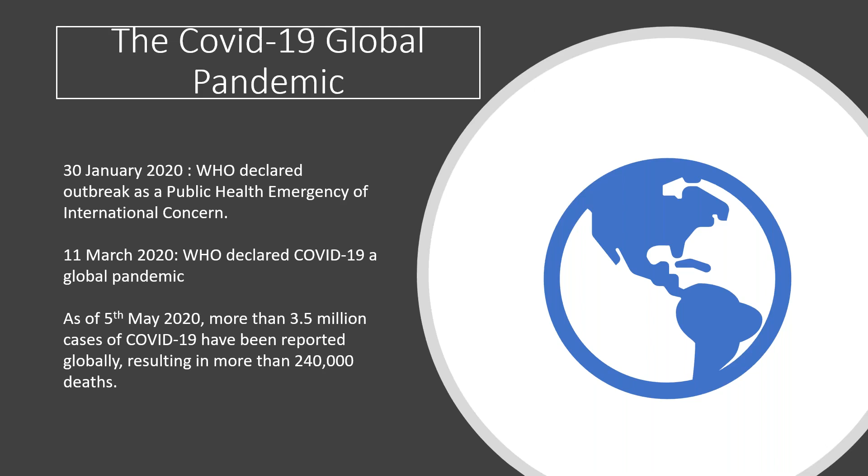This all started in November, December, and on 30th January 2020, WHO declared this outbreak as a public health emergency of international concern. And on 11th March 2020, it was declared as a global pandemic, and things changed from then onward. As of 5th May 2020, there are approximately 3.5 million cases of COVID reported globally, resulting in more than 240,000 deaths.

Now, what is the characteristic of this pandemic? It's very important to understand. This disease has spread quickly to all corners of the world, and its capacity for explosive spread has overwhelmed even the most resilient health systems.

Severity: overall, 20% of the cases are severe or critical, with a crude critical clinical case fatality rate currently of over 3%, increasing in old age groups and those with certain underlying conditions.

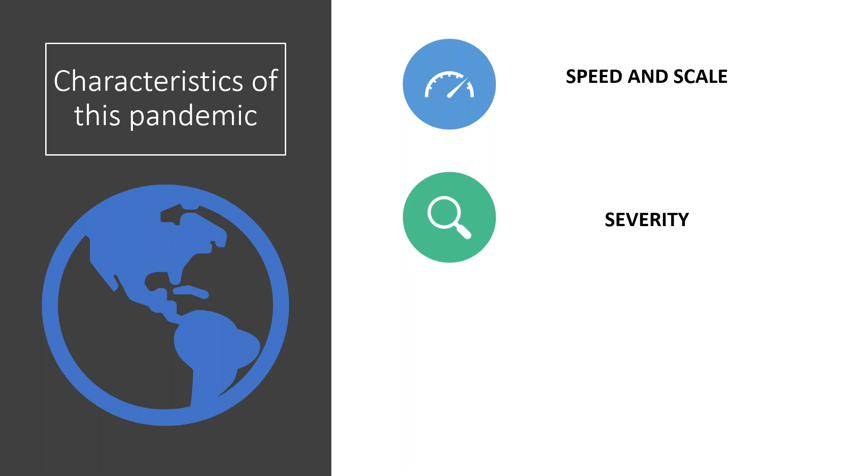And this pandemic has sent shocks to health and social care systems. Measures taken to control transmission have led to broad and deep socioeconomic consequences.

So what is this COVID-19? This is basically the name of a disease, coronavirus disease 2019, called COVID-19. The official name of the virus spreading this disease is SARS-CoV-2. The range of symptoms for this disease are from mild illness to acute respiratory distress. At present, there is no vaccine or therapeutic provision proven to treat or prevent COVID-19.

Now, it can affect all ages. However, as I said, it gets more severe with age.

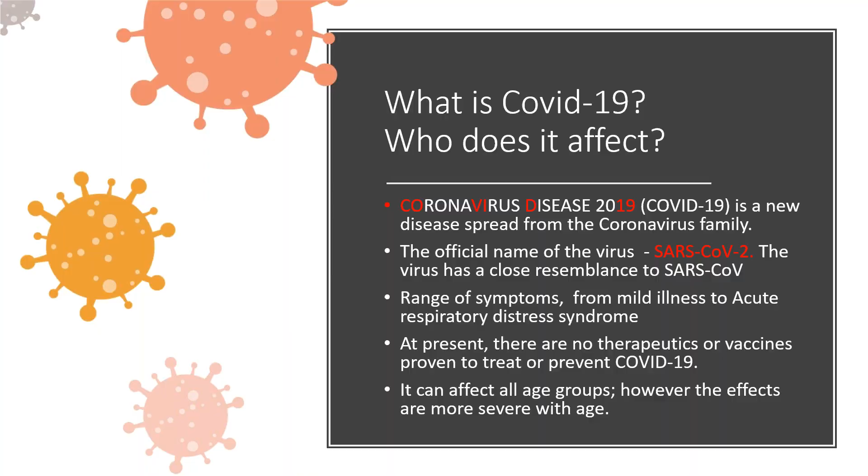How is it transmitted? Of course, person-to-person contact. So someone with the virus sneezes or coughs on anyone, leaving respiratory droplets on skin or clothing, or someone touches someone who has the virus on their skin or clothing. That's how it escapes from an individual, and then the transmission happens. The individual then touches themselves, giving the virus an entry point via mouth, nose, and eyes.

So there are 3 stages: it's an escape stage where it escapes from one person, there's a transmission stage, and then it enters.

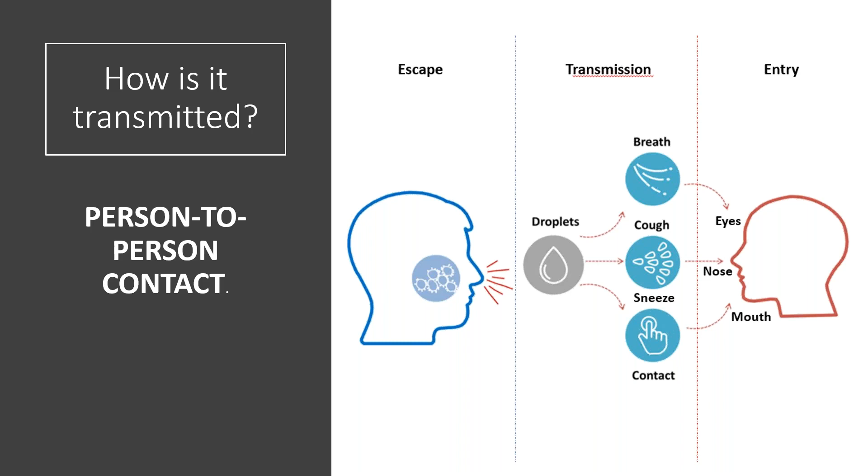Every workplace will be required to take care of this transmission, especially at this stage, where every workplace has to be ready to stop this transmission, especially happening from asymptomatic individuals, to increase the safe environment for every employee in the workplace. This transmission stage becomes very critical.

This COVID-19 pandemic has presented new and incredible challenges for millions of workers around the globe. In just a matter of weeks, the workforce at large has quickly and strategically navigated the sudden shift to remote working while maintaining this symbiotic relationship between business continuity and employee well-being. As we look ahead, organizations across the globe are grappling with how they can plan, communicate, and transition hundreds and thousands of employees to the office with new guidelines and policies to maintain the health of both employees and the workplace.

So workplace will face many challenges to accommodate this new normal. This is what we want to discuss in today's webinar: what are these challenges and how we can overcome that?

Now, why is it required? Of course, people need to be safe and feel safe when an employee plans to return to work. Offices need to make choices carefully and responsibly. Employee safety and well-being must be paramount to any organization. So people need to feel safe and be safe in that work environment they're going back to.

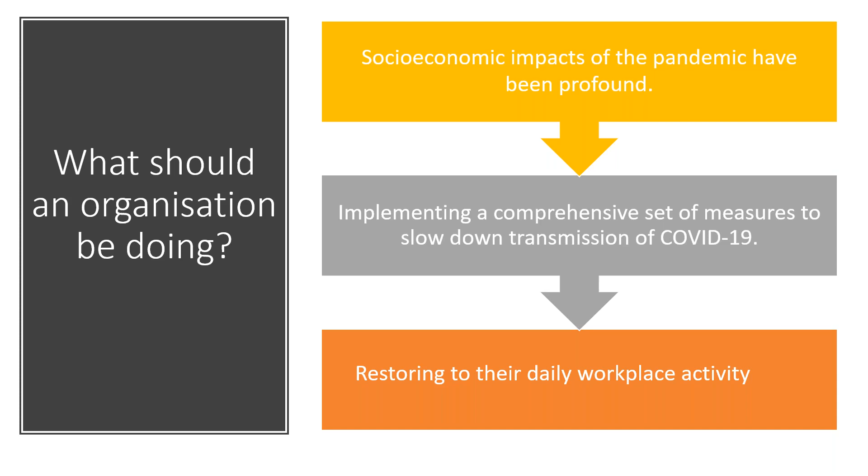Now, what should an organization be doing? Of course, the socioeconomic impact of the pandemic has been profound. Every organization should implement a comprehensive set of measures calibrated to their capacity and context to slow down transmission of COVID-19, ultimately with the aim of reaching and maintaining a steady state of no transmission and restoring daily workplace activities. I'm not going into the cost - the whole transition will be a cost to a company, but this has to be done to be ready for the post-COVID workplace scenario.

So what we have done is we have tried to categorize strategies into 3 parts. An easy one, which we feel is a quick fix solution - find and replace solutions for any workplace. Then a physical one, where a space requires reworking, like layout improvement, HVAC, ducting and redesigning, rerouting, creating additional barriers, maybe glass partitions, or biophilic design can be integrated. That's the physical one.

And the third is operational or policy change that every organization has to go through. For example, allowing not more than 50% employees to be in the workplace, doubling infrastructure setup for home and offices, break timings, office timings, transportation facilities. That is the operational change that everyone has to go through. This is how we've categorized the presentation - into easy, physical, and operational.

Every workplace has to come up with a specific strategy addressing their building needs and assessment, which will be based on a building by building basis. Areas which we feel need attention are building systems, architectural design, interiors, plumbing, housekeeping, some innovative technology that has to be introduced, nourishment, and of course policy and strategy practices, standard practices. So we're going to cover all these in the coming slides.

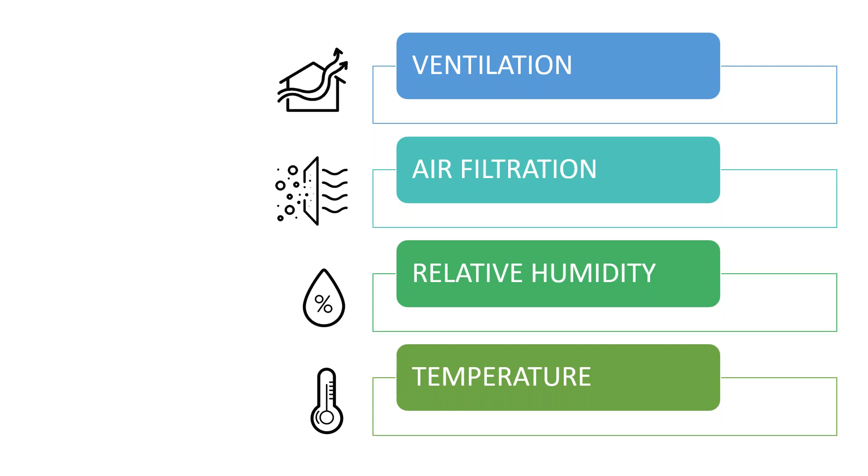Jumping to ventilation. Ventilation represents a primary infectious disease control strategy, and it can play an important role. In case of natural ventilation, dilution of the air will be 100%, and it is expected the removal of infectious agents will be 100%. Designs that achieve higher ventilation rate will reduce risk, and that happens in natural ventilation for sure. So natural ventilation becomes an ideal case, which allows 100% outside air circulation.

However, it won't be possible in many buildings, as they are designed to be centrally air conditioned. That's the challenge most buildings will face, as they are not naturally designed to be naturally ventilated.

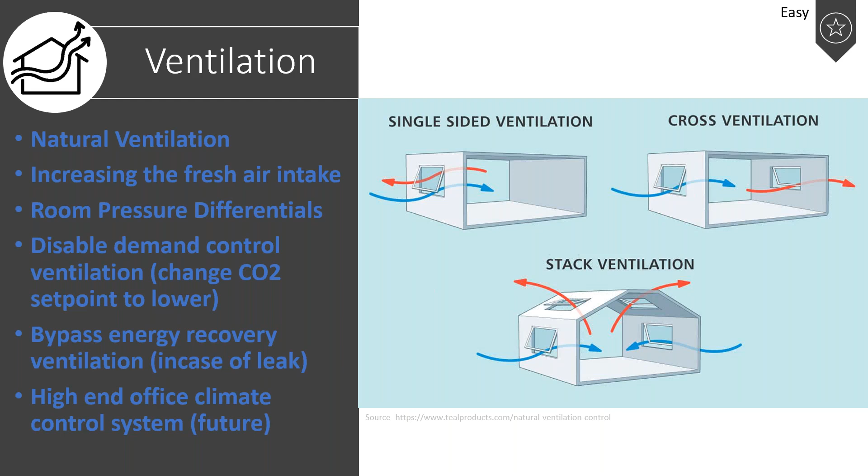In case of an air conditioned building having no or limited provision of natural ventilation, increasing outdoor air ventilation would be an ideal option. That's one way of allowing more air from outside. This may require disabling demand control ventilation, if it is part of the system, and opening outdoor air dampers to 100% or less as indoor-outdoor conditions permit. It's important to understand the outdoor conditions, because of pollutants and everything. So it all depends on what the outdoor conditions are as well.

It is advisable to run ventilation systems for longer hours. That's the recommendation we feel everyone has to follow - it's better to run an air-conditioned building's ventilation for longer hours, if possible 24/7, maybe at lower speed during unoccupied hours. That's how it needs to be done to avoid any infection or aerosols within the space. Project teams may also think of bypassing energy recovery ventilation systems,

if that poses a potential leak, which can contaminate the outdoor air coming in. So this has to be evaluated.

Now, the interesting part is we can use the demand control ventilation system as a monitoring strategy. Just by changing the set point of CO2 to a lower level, say 500 to 600 ppm, it will enable more fresh air into the system. Again, the system has to be ready to accept that, but demand control ventilation can work as a monitoring strategy as well.

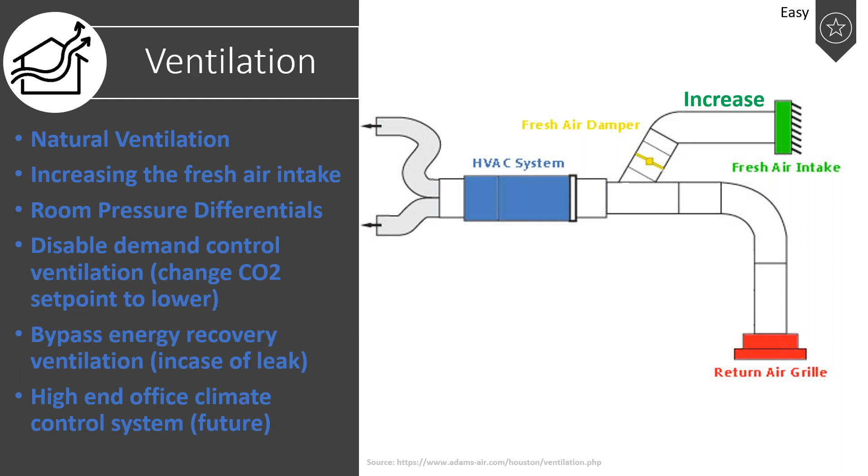High-end office climate control systems will definitely appear. It used to be a feature, but post-COVID it will be part of the buildings. Very new technologies will appear and will help in maintaining the systems.

The quick recommendations for ventilation: supply as much outside air as reasonably possible - that's definitely a recommendation. Change the clock times of system timers to start ventilation at normal speed at least 2 hours before building usage time, and switch to lower speed 2 hours after building usage time. At least this needs to be done.

The third recommendation is exhaust ventilation systems of toilets should always be kept running 24/7, and make sure negative pressure is created, especially to avoid fecal-oral transmission. This is a new study that has come out, and we'll cover that in the next few slides.

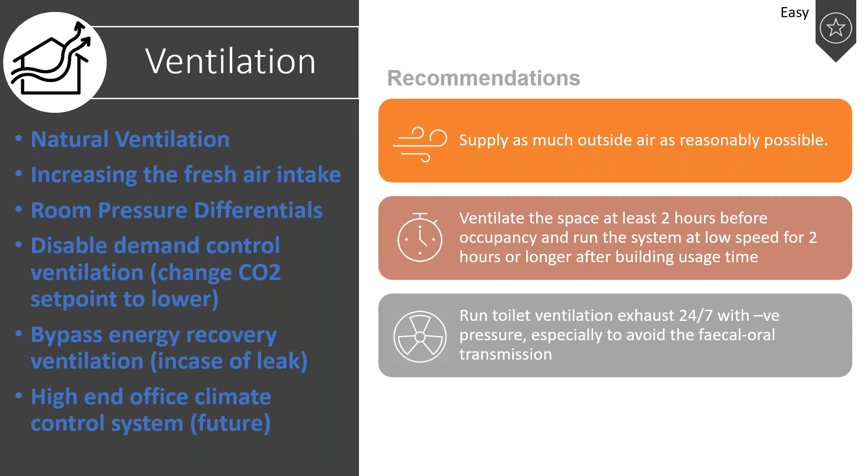That's on ventilation. Air filtration: the use of highly effective particle filtration in centralized air conditioning systems will definitely reduce the airborne load of infectious particles. This strategy will reduce the transport of infectious agents from one zone to another when these areas share the same central system through supply of recirculation air. So where there is supply of recirculation air, the filters will definitely play an important role.

Now, what levels of filters are required? It's important to understand that improving central air and other HVAC filtration to MERV 13 or higher, if achievable, would be the recommendation. However, it all depends on AHU capacity, static pressure, age of system - all that will also decide what highest level filter can be put in place for the filtration media.

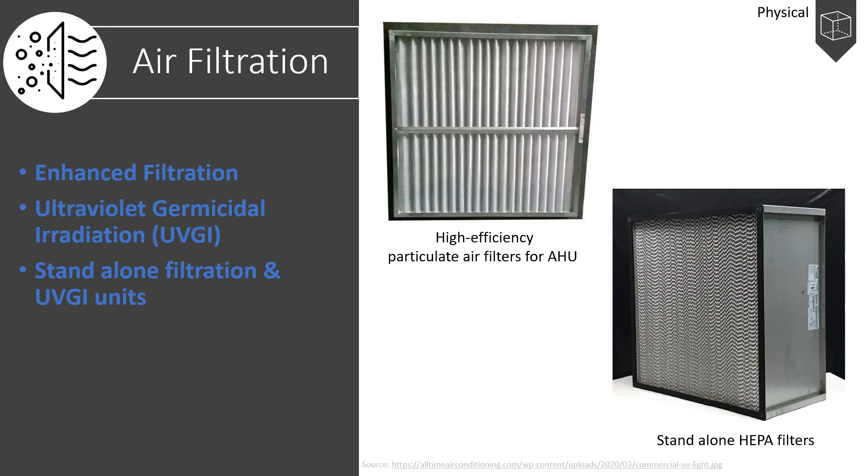Additionally, in case of system limitations, portable room air cleaners with HEPA or high MERV filtration, with due consideration to the clean air delivery rate, could become an alternative solution. If there is a limitation, this could be a solution - having a portable system within the space.

Along with filtration, UVGI, which is ultraviolet germicidal irradiation, could be considered, particularly in high-risk spaces such as waiting areas, receptions, and common areas. They can be installed with the AHU, or they come as a standalone as well.

Such installations, like UV systems or ionization units, are more relevant to healthcare facilities. But considering the current situation, they can be considered. UV treatment could be really effective in a building having no option but to recirculate some return air. However, this is very important.

If the building is able to maintain a 100% fresh air system, a UV system is not effective, as outdoor air is not a contamination source. So that needs to be ensured - if there's a naturally ventilated building, or we are able to supply 100% fresh air, there is no need of putting a UV system into the building.

Again, as I said, there are many portable solutions available which can be used as and when required for small offices where there is a limitation with the return air circulation.

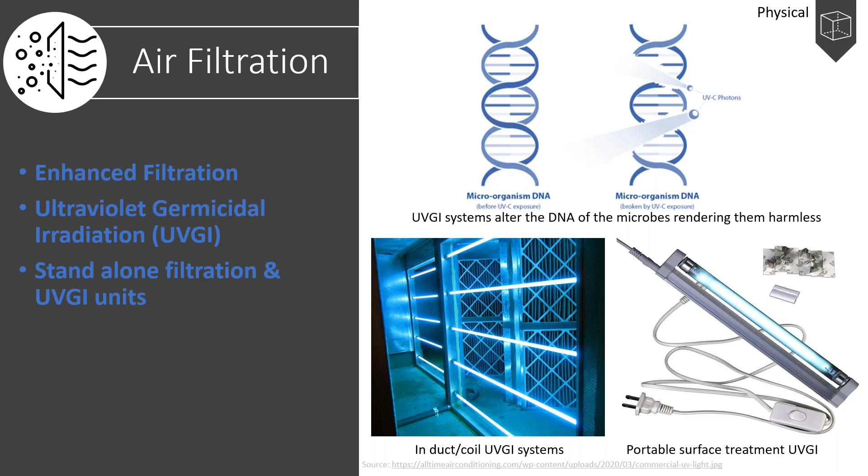Humidity. Now, humidity and temperature - there's a lot of research going on, and a lot of debate going on, on how do we maintain this and what is the right approach. So HVAC systems are designed, or can be designed, to control relative humidity. Yes, of course, there are practical challenges and potential negative effects of maintaining certain RH set points in all climate zones. For example, high humidity in cold climate may lead to condensation, which eventually leads to fungal or mold growth.

But many immunobiologists have correlated mid-range humidity levels with improved immunity against respiratory infection. This graph, from one of the research papers, clearly shows that chances of infection reduce at higher RH levels - beyond 40, it shows that the infectivity reduces.

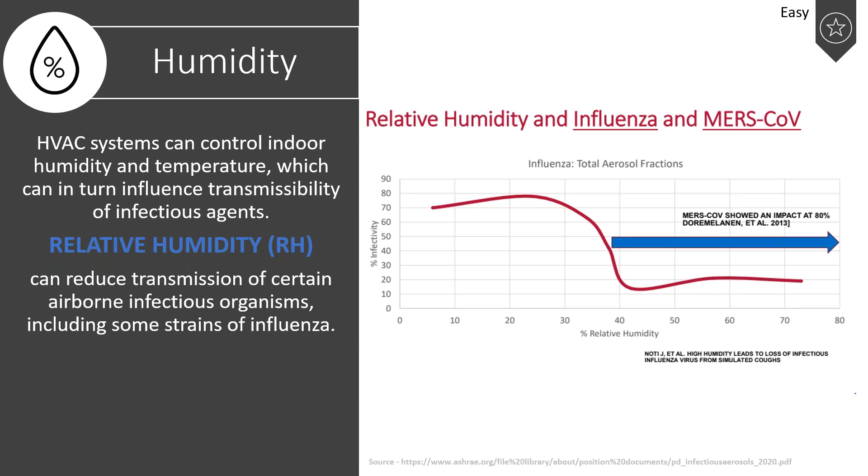However, it is early to say or conclude if the same is applicable to COVID-19, as many researchers are saying otherwise as well. But that's the research that has been done on influenza or MERS-COV, which is very much saying that increasing the humidity beyond 40 may reduce that.

How does it happen? There are three mechanisms that could potentially explain this and influence it. People inhale fewer droplets at a higher RH due to slower evaporation from large droplets. Infectious aerosols emitted from a primary host shrink rapidly to become small nuclei, and these dormant yet infectious pathogens remain suspended in the air and are capable of traveling great distances.

So high humidity could be a solution - if there is high humidity, there is less chance of smaller nuclei forming. Mostly it will be large droplets which will eventually settle down. So that's one way of justifying that high humidity could work.

Second, breathing dry air could cause desiccation of the nasal mucosa, which renders the host more susceptible to respiratory virus infections. So that's the second observation.

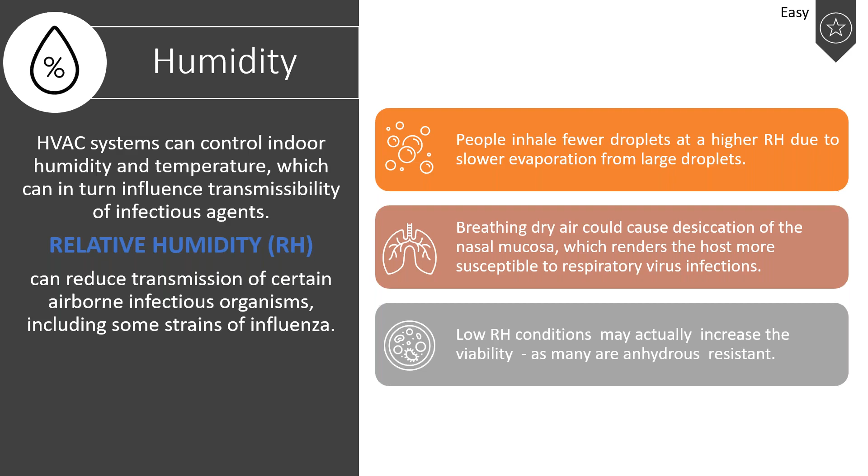The third is, many viruses and bacteria are anhydrous resistant - they can survive without water. So they survive in zero moisture and actually have increased viability in low RH conditions. So to conclude, RH between 40 and 60 would be the recommended solution till new research says otherwise.

Temperature. Whether SARS-CoV-2 is temperature resistant or not is again part of ongoing research. There is a specific temperature that best fits the benefit of the virus. Researchers have shown that lower temperatures contribute to the transmission, because it is when the viability increases.

Of course, the higher the temperature, the virus becomes inactive, but that higher temperature is really high - from 37 degrees to 56 degrees. However, there is not much evidence supporting the case that case counts for COVID-19 could decline when the weather becomes warm.

Again, there's many researches that has come out, especially from Italy and all that - warm weather has not stopped the transmission, but it could be said that viruses survive less at higher temperatures, and they become inactive.

So the suggestion that keeping temperature as high as possible can be an effective management strategy, but how far are we ready to raise the temperature is the question in a confined space. Keeping the adaptive thermal comfort model in mind, it is suggested that unless absolutely required, all indoor air conditioning systems be operated at or above 25 degrees Celsius, or even more if possible. So higher temperature would be better - thermal comfort will be compromised, but that's how it is.

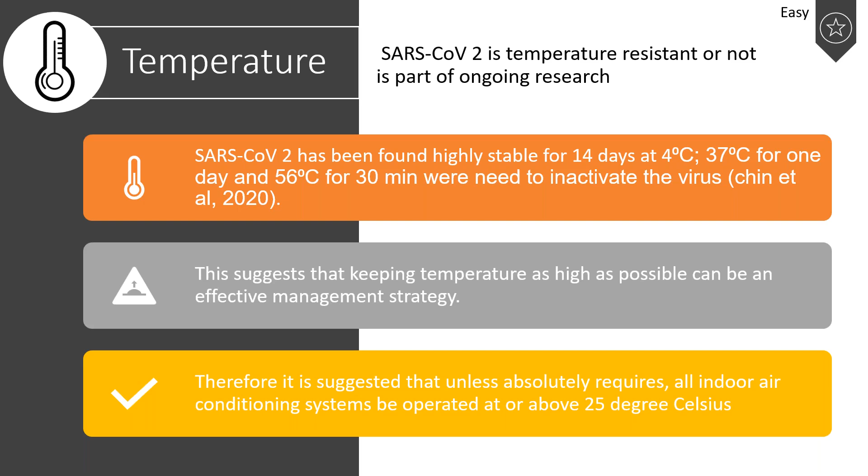So some research findings are saying that COVID-19 is quite resistant to environmental change and is susceptible only to a very high relative humidity, above 80, and a temperature of 30. So it's very much debatable, but these are the strategies that we are recommending, at least for now.

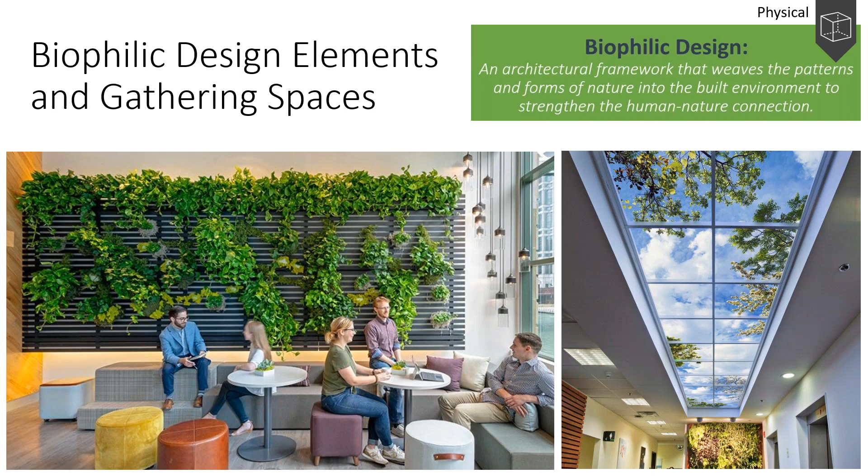These natural elements may include indoor greenery, atriums, podiums, and outdoor meeting spaces. These spaces will not only provide for fresh air circulation, but also allow people to practice social distancing more effectively and promote mental well-being, which is a key word these days.

Now coming to the topic of materials. Materials are a very important consideration in workplace design. An antimicrobial surface is one that inhibits the growth of microorganisms that may be infection carriers, such as bacteria, fungi, or viruses.

Now coming to these three categories: antibacterial materials. These are the materials that combat the growth of bacterial materials on a surface by preventing the initial adhesion of cells to the surface. Smooth, non-porous surfaces such as ceramics and stone have good antibacterial properties.

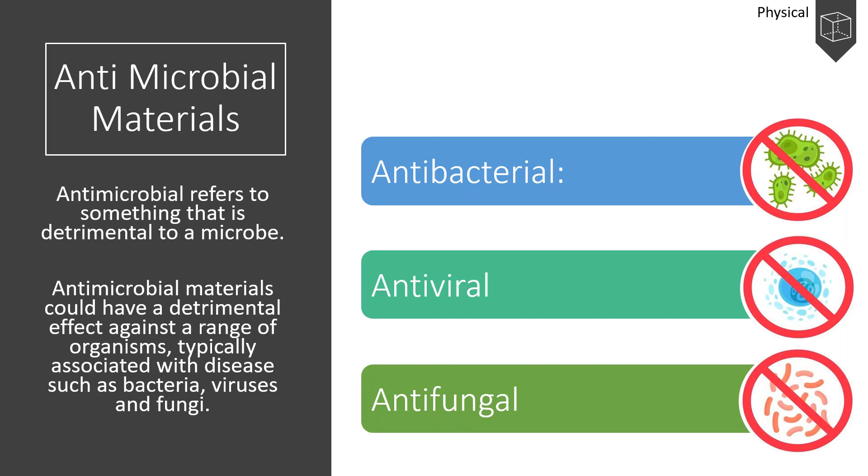Viruses such as COVID-19 are transmitted when a person touches respiratory droplets settled on an object or surface. Antiviral surfaces could play the biggest role in cutting down the spread of a virus. In this regard, copper and its alloys are known to have antiviral effects.

After incubation for 1 hour on copper, influenza virus particles were reduced by 75%, and after 6 hours, particles were reduced by 99.99%, making them an excellent choice over stainless steel, which does not have any antiviral properties. In case of air conditioning systems, the use of antifungal materials such as copper can be seen to prevent the dispersion of fungal spores through HVAC systems.

Now how do we achieve these antimicrobial surfaces in the workplace? Some of the strategies may include, the first one is materials. Copper and copper alloys have the natural ability to kill harmful microbes. The United States Environmental Protection Agency, EPA, has approved the registration of 355 copper alloys as antimicrobial materials.

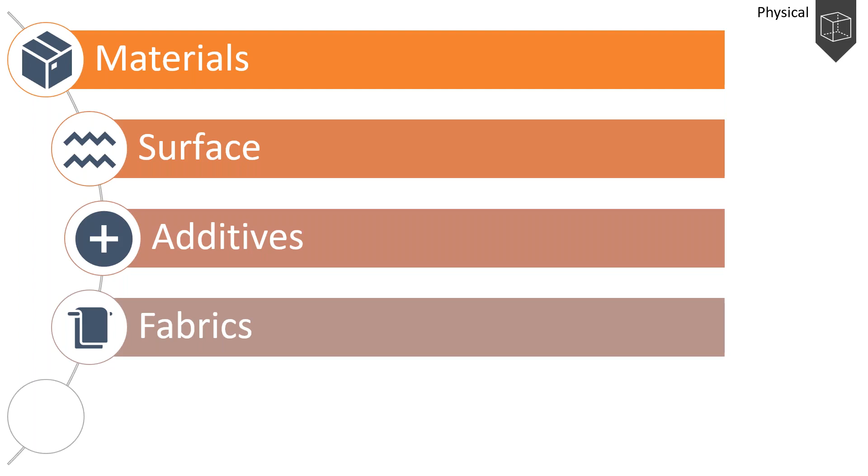The second is surface - smoother finishes are preferred over rough, pitted surfaces. Additives such as silver can be formulated into concentrated powders or liquid suspensions that can be integrated during the manufacturing process of a material. Fabrics can be made from a variety of different textiles by embedding fibers that prevent microbial propagation.

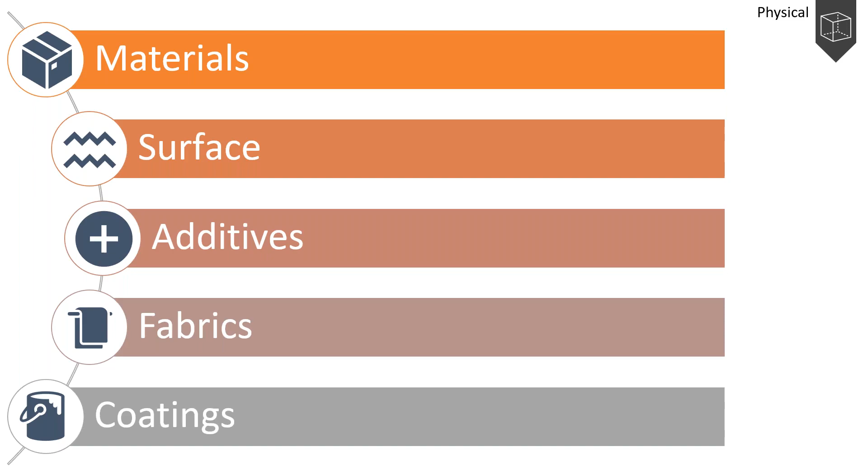These fabrics are already in use in healthcare services, but now, given the spread of this infection, they may be explored further for spaces such as waiting rooms and lounges that are multi-occupant spaces in the working environment. And the last is coatings. For existing office spaces that already have all the furniture in place, antimicrobial coatings can be used. These are typically applied or sprayed onto the different surfaces of the office.

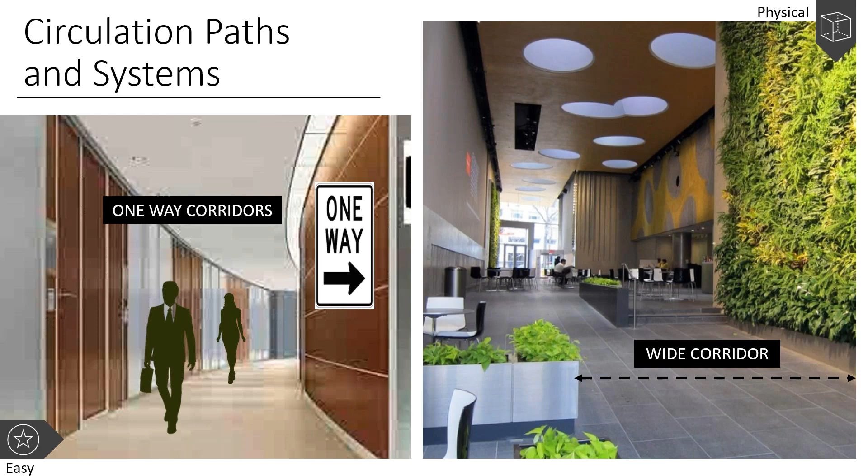The way these messages can be given to employees is using signage arrows, posters, and displays. These displays can also be used to promote the use of staircases so that the workload on the elevator systems is also reduced. Now, changes begin small, and a good place to start redesigning and reevaluating is doors and windows.

A healthy, hygienic workplace inhibits transmission by reducing the requirement of touch. Therefore, touchless doors and windows are gaining tremendous popularity. This can include elbow-operated handles, foot-operated pedals, and even gesture control systems and voice control systems.

So coming to interior design and ergonomics. Space planning, circulation, and programming will see new light in the post-pandemic workplace. With a renewed focus on health and life safety, interior design strategies will consider a new order of ergonomics and definitions for social interaction, social spaces, and social barriers. As we step out with this sense of awareness, our design must support ways of working, segregating, and congregating.

Workstations: the first and foremost thing that can be applied to workplaces, which is a very easy strategy, is to increase the spacing between the different workstations. Clusters will have to separate to meet the 6 feet or 2 meter social distancing, and this can be achieved by moving around furniture or designating seating areas and eliminating the others that do not follow the prescribed distance protocol.

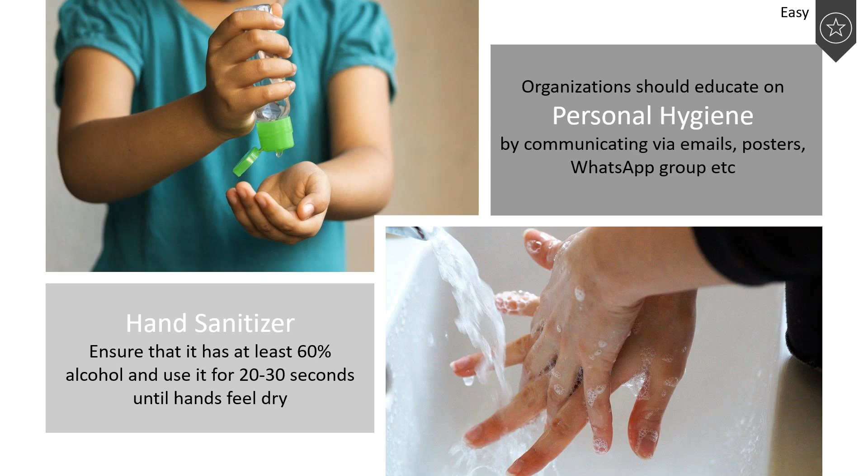Every organization will be required to establish professional cleaning and sanitizing protocols. They can follow WHO protocols or national standards established for post-COVID workplace scenarios. What is important is to follow the right cleaning practices and select the right cleaning materials and ingredients.

Importance should be given to the sequence of cleaning steps. The protocol has to be defined with the sequence of cleaning steps, use of personal protective equipment, and proper disposal of those PPEs. That's very, very important that those PPEs are disposed in a proper way.

This is a major area that's got to be given special attention, as it may lead to contamination again. This has to be given special attention for housekeeping and all, and it is a major risk.

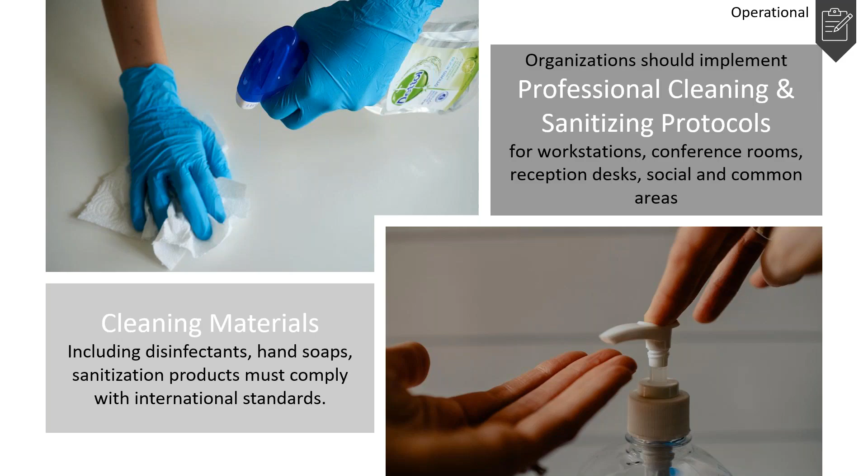Jumping on to innovative technology, this pandemic has shifted the perspective of technology from touch to new avenues such as sensor-based systems, automation of processes based on sensors, voice control. All that can be explored now, and take advantage of it. For example, a project should be ready to make a shift from biometric systems to touchless technology, maybe a face recognition system, scanning, touchless fingerprint scanning, and all that could be part of the system.

Temperature guns and thermal cameras would become the first line of defense for some time, until infection levels or cases subsequently reduce. People entering the building will be checked for temperature using temperature guns or thermal cameras.

Further to touchless technology, real-time monitoring of the workplace should be encouraged and implemented. Features like monitoring social distancing, having crowd indicators, controlling IAQ monitoring, which can be integrated with demand control ventilation, safe and smart cleaning monitoring systems for housekeeping - all these options could be explored.

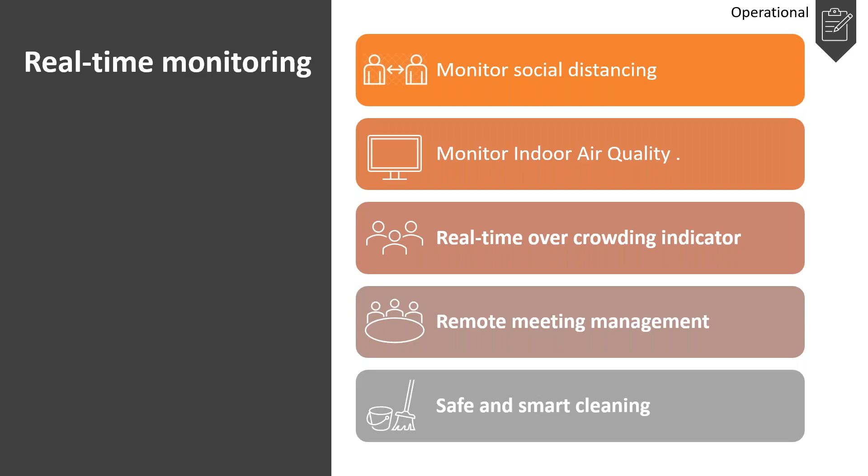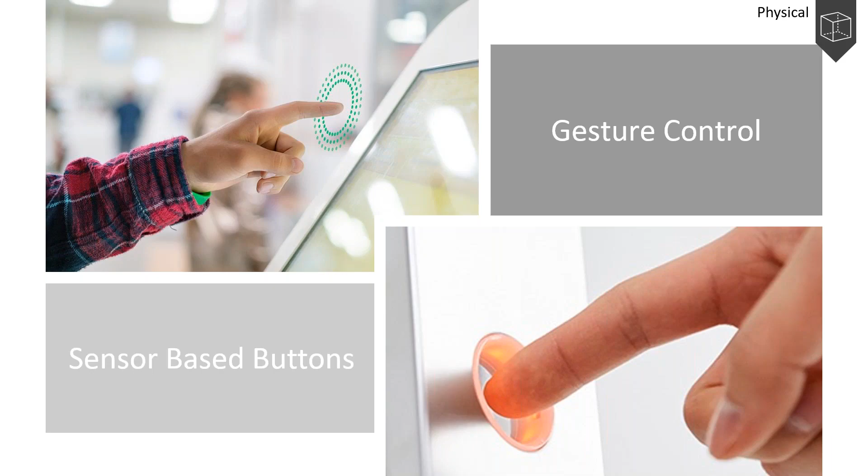This part, nourishment and fitness, we feel should be given quite a good importance, because a good immune system is the first line of defense against all kinds of diseases. Buildings should provide nutritious eating opportunities as well as mental and physical fitness opportunities to their employees to foster health.

Building immunity is one thing to avoid the infection that is around. Providing fresh fruits and vegetables to employees could be a good option, as the majority of employees will definitely get their food from home in the initial days, to avoid any contamination.

They should be encouraged until food courts and cafeterias are open or ready to serve food. So providing fruits and vegetables can be a good option, and of course encouraging

drinking water should be promoted, to keep everyone hydrated. All of us know that it helps build more immunity if you're hydrated.

Whenever possible, employees should be encouraged to dine outside, create more such spaces in the building if possible. Give access to terraces and landscape areas. This will avoid overcrowding in the dining cafeterias. Outside areas are anyway better than indoors to reduce infection. So encouraging people to eat outside would be a good option. Of course, it depends on the availability of the area, but if there is one, it should definitely be encouraged.

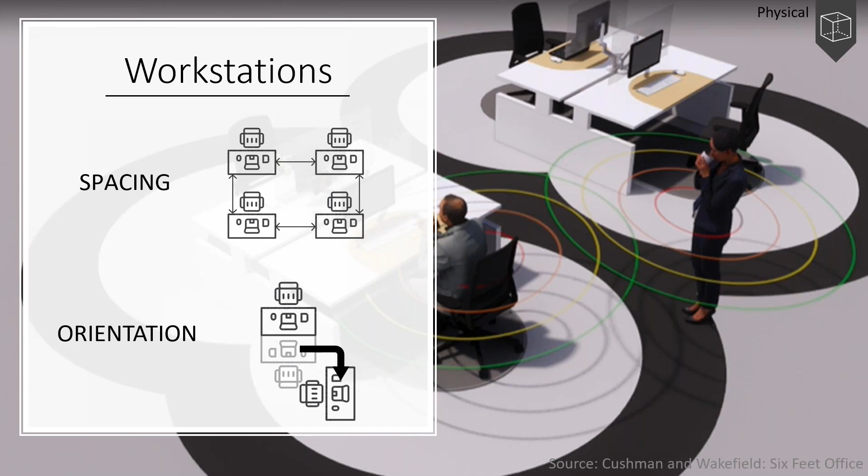I think this can be the last question we take up. It's hard to give a proper answer to a question about cost. The question is, how do we make clients understand this, since there's a cost attached? Will these eventually be formed into standards and made mandatory in offices? Let's just share our thoughts, because there's no definitive answer for sure.